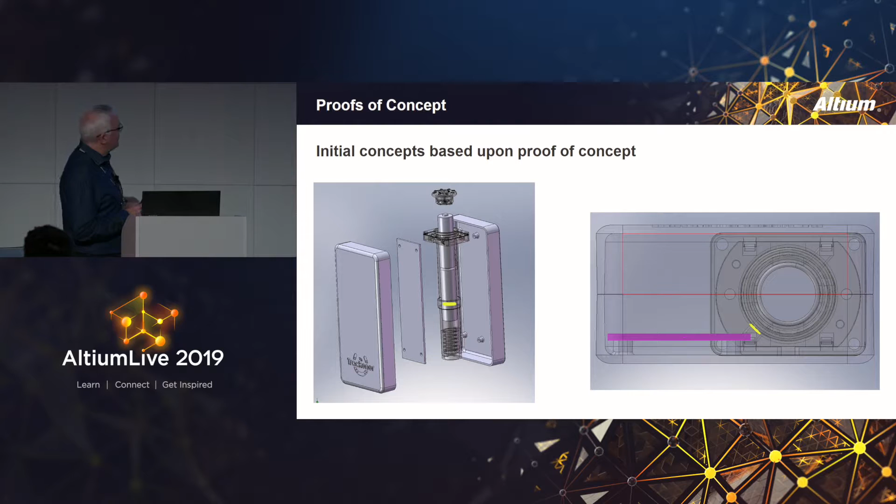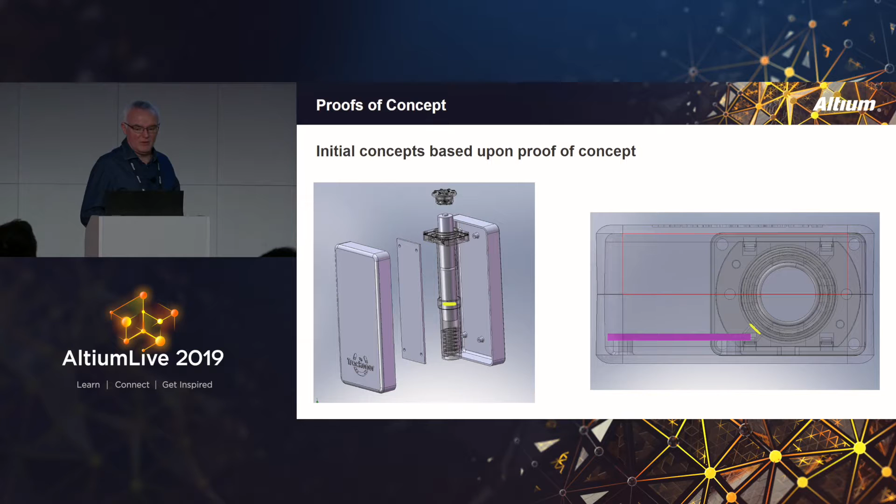And then we went and looked for a battery holder and things like that. But because of the space requirement of trying to get this device down between the forelegs and to fit the harness, which had already been designed, there was then the question of, okay, so we've now got some issues around where do the antennas go, and we've now got this nice big chunk of metal that sits over the circuit board. Excellent. Just what you want if you want to create a reflector.

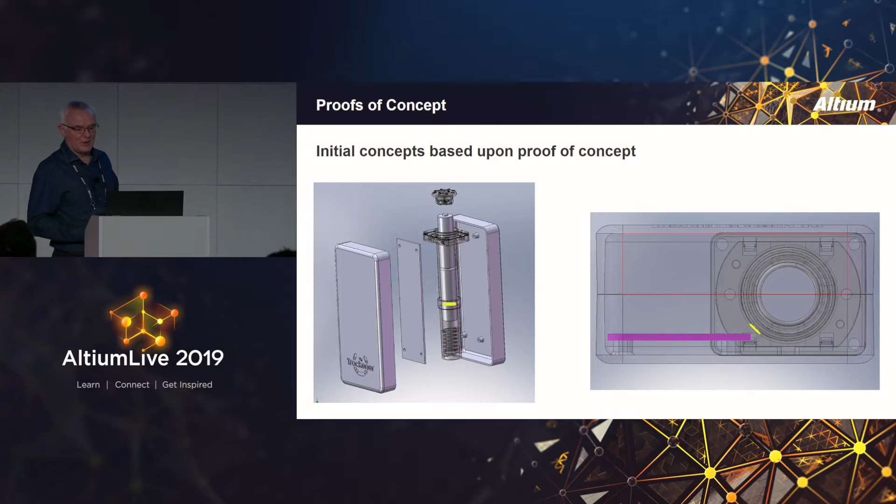So we did some concepts, and I should explain there aren't any circuits behind these boards. This was literally early stage, pre any significant investment. These were literally hand-placed components, just to get that initial feel of where this design is going. So one of the first things we established was that this white area was basically the starting point location: there will be an F-type antenna to do cellular there somewhere, and we'll figure out the exact details. I hasten to add the antenna design is done by a colleague of mine, so detailed questions on antenna design, don't direct them at me.

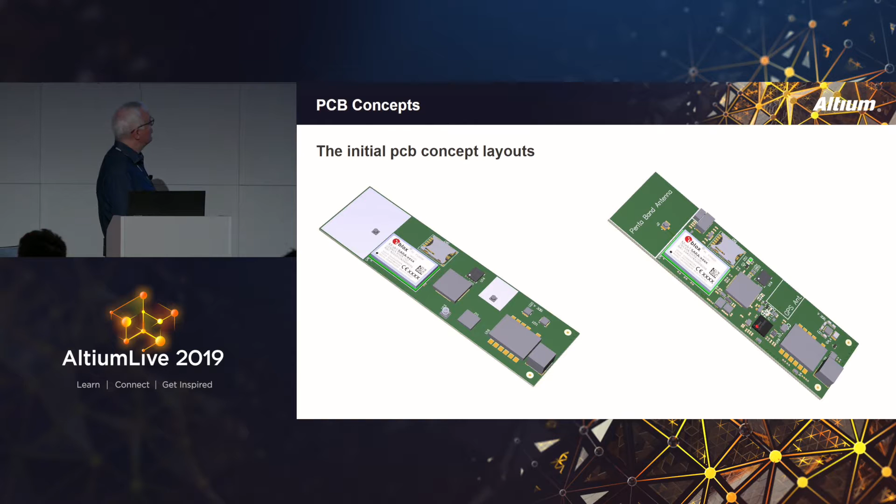One of the other challenges you've got, and this is a common problem with most IoT products, is as soon as you start putting a cellular module with any form of GPS, you now need to make sure there's a significant loss between the two, because otherwise, inevitably, you're going to deafen that GPS receiver fairly quickly. And not just when the GPS transceiver is turned on. Even if you power it down, you've got to have some loss between these two antennas, and that's partly the reason for the separation of the antennas and some of the trade-offs.

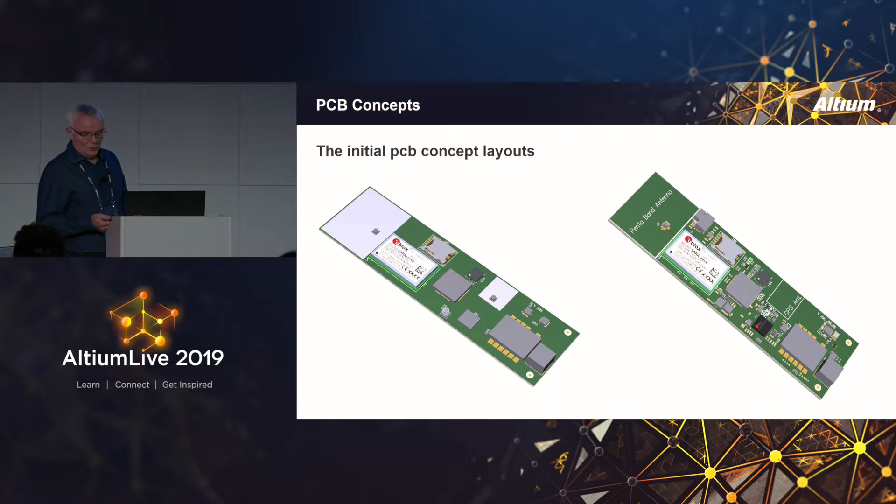So we did some more work, and needless to say, there was the inevitable mechanical work in SolidWorks. But as you can see fairly quickly, the battery holder itself is plastic, but you've now got this metal barrel sitting over the circuit board with two antennas on it. So that created some challenges, and my colleague started to look into, okay, how does that load the antenna?

Because we all know, as Rick explained so well in his presentations, as soon as you start putting anything above a trace on a board, whether it's solder mask, conformal coating, or even better, something nice and conductive, you've completely changed the field dispersal around that board. So we'll come on to some more detail on that, but that was at least to give an idea of where we started.

One of the other things I should explain, the original design was USB charged. The only problem with that was you'd have to go out periodically to the horse, take the device off the horse, take it home, and plug it into a USB port, because for some strange reason they don't put USB ports in fields that horses are in. I can't understand why. So that was the other reason for the replaceable battery, and obviously the other advantage of nickel metal hydride is it comes in a nice convenient AA size cell.

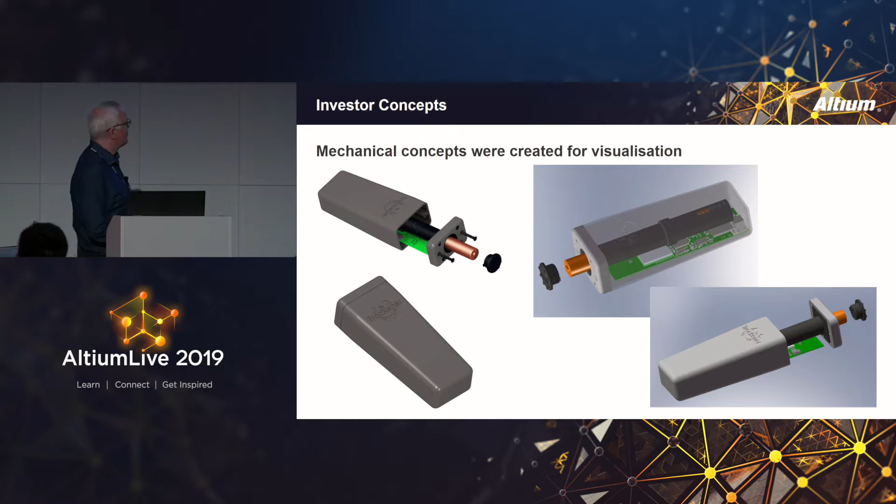What we also learned, unsurprisingly, is that that type of material is great for getting forms together, but structurally it doesn't work so well.

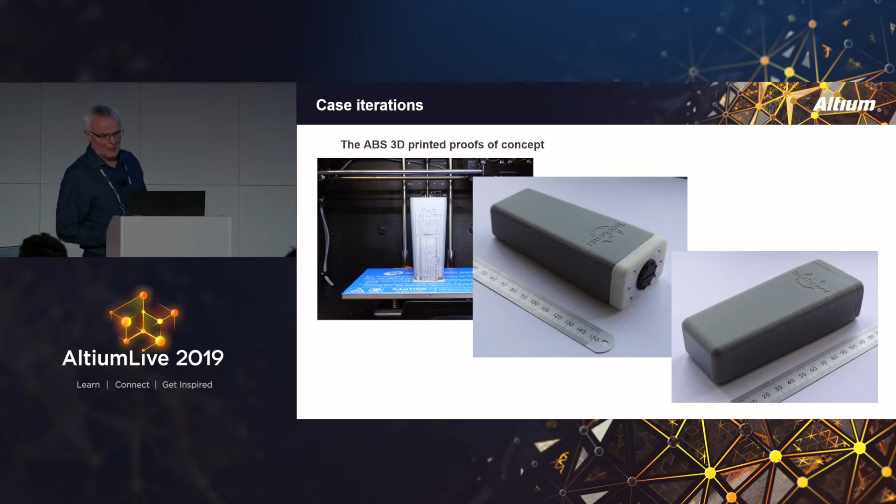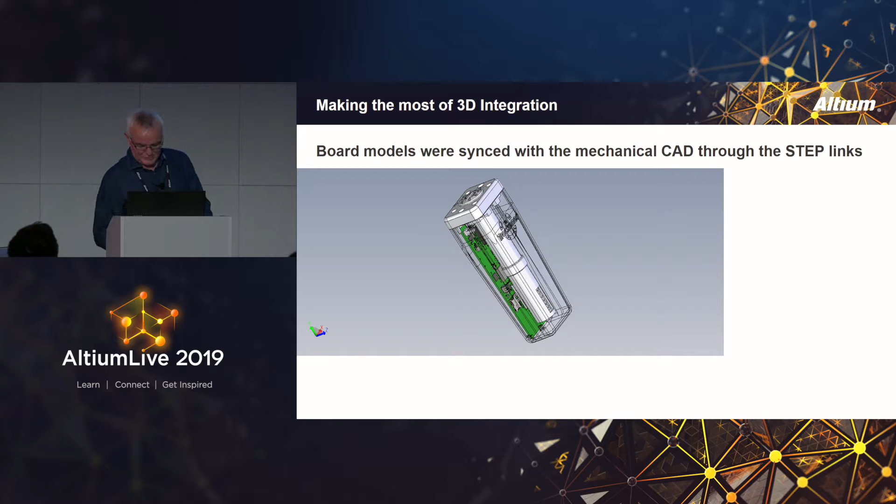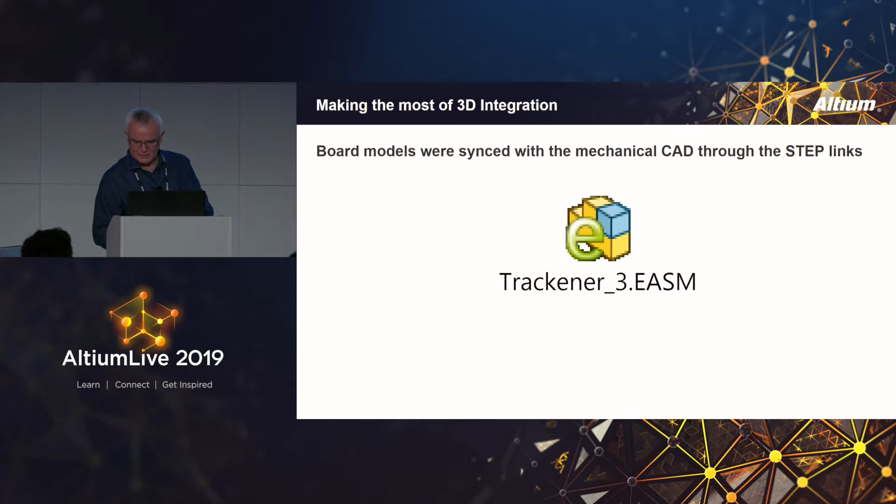So we ended up. So forgive me, I'm going to do that live demo thing, and this will probably go horribly wrong, but we'll give it a try. So we ended up, and this is, for anybody who's worked in some of the other CAD systems, this is where, I have to say, having done other odd, funky form factors, it's just, I've got to do, is it going to get me across? Yes. No. I knew this was a bad idea. Okay. So if you'll just forgive me a second. Do you have to take it out of presentation mode? Yeah, I think you're right, Rick. I'm just gonna have to. Right. Okay. Not ideal, but it'll do.

So I won't float it around too much, but as we saw in the keynote this morning, no secrets how this was done. There's the STEP export from Altium. This was in fact done in SolidWorks, but it just gives that reinforcement of just how good Altium is at this kind of thing. I hasten to add we've been doing this for a while, albeit the flow is a lot simpler, and I'd love to get to the kind of slickness we saw earlier.

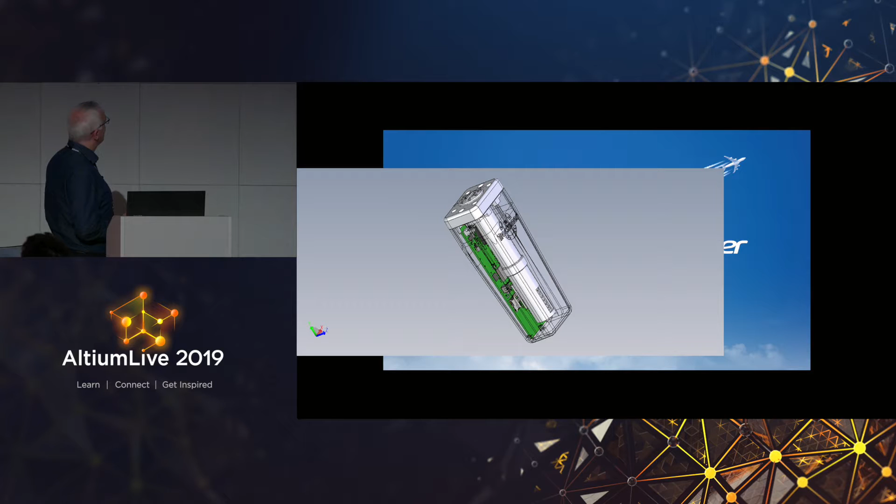But you start to get an idea of the problem. When the battery's out, we've got this nice big spring. We don't have to worry about that too much because it's compressed when the battery's actually inserted. But even so, we've now got a compressed spring plus the battery sat right over a cellular antenna. That sounds good. And as we'll come on to a little later, we've got to start thinking about where the GPS is going to fit.

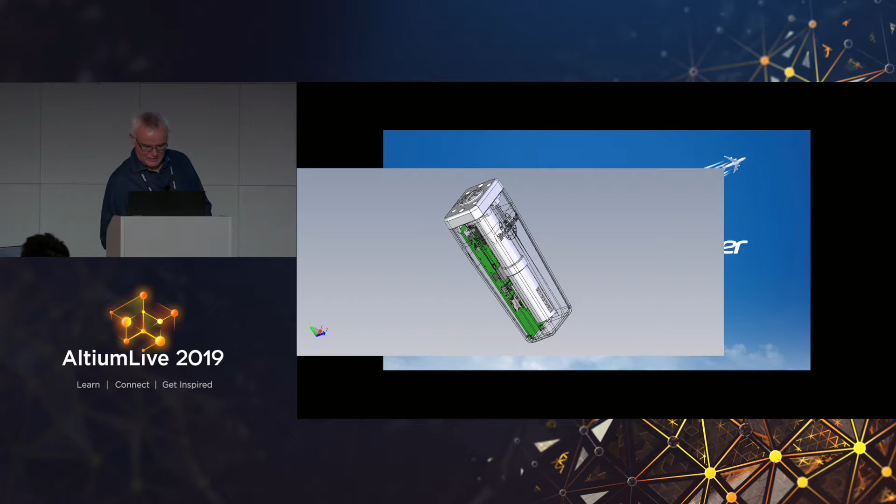So let's see if we can do this without. Oh, that's a new one. I've got an Altium slide deck in an MCAD drawing. That's quite new. Okay, let's get rid of that. Okay.

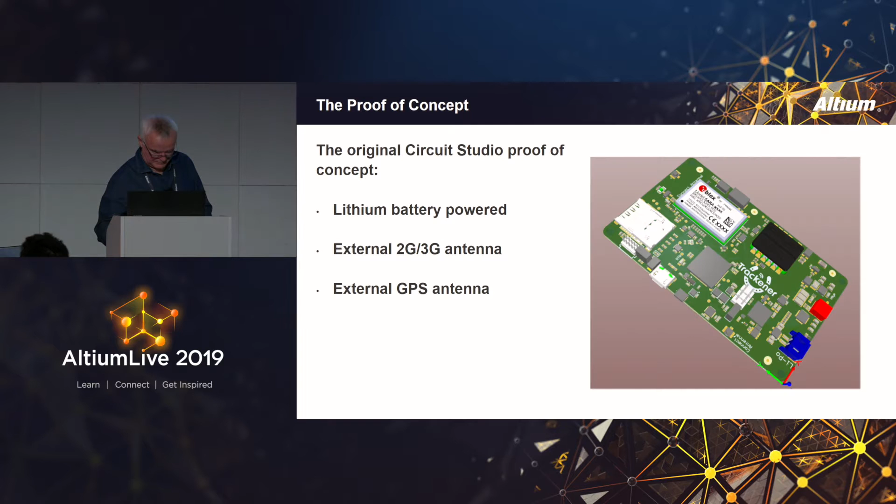So, by way of a slight digression, the other inevitable one that always crops up: regulatory. I touched upon it a little with battery safety, but of course we're now doing a radio product. So whether you're in North America and you worry about FCC, or in the EU and you worry about CE and the Radio Equipment Directive, you've got to think about them. And you've got to worry about battery safety standards.

One of the other reasons we encouraged in this particular case to go away from lithium: for anybody who hasn't been involved with lithium products, it comes under the dangerous goods regulations, a UN regulation. It's completely global, UN 38.3. What that basically means is, depending on the amount of lithium content in the battery, if you're really lucky and you've got a small lithium polymer cell in a product, you may find you can just pop one or two devices in a box and send it to somebody.

But as soon as any of the lithium content, or particularly if you've got smaller devices but you want to start mass shipping them, suddenly you move into the whole world of UN 38.3 and dangerous goods regulations. Well, that doesn't sound that bad. Is it a bit of paperwork? Well, no, unfortunately it's not. You get into, very quickly, a bunch of things.

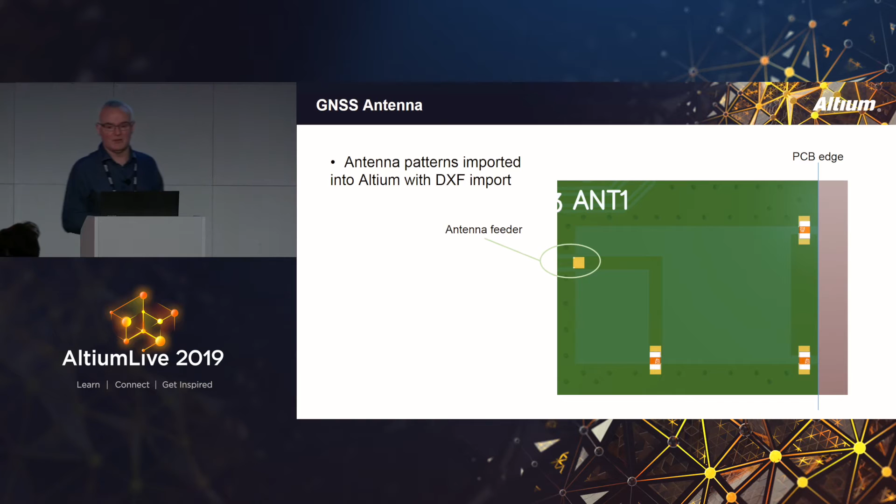So very quickly, I'm mindful of time, so I'm not going to go through the details. As I say, I'm not an antenna designer, but just to give people a flavour - this was an L-shaped antenna, so we could support the various frequencies of GPS and GLONASS. The way we did this, the classic approach, the RF engineer sketches up the features in DXF, and then we import them and create the symbols. We did the same with the cellular antenna.

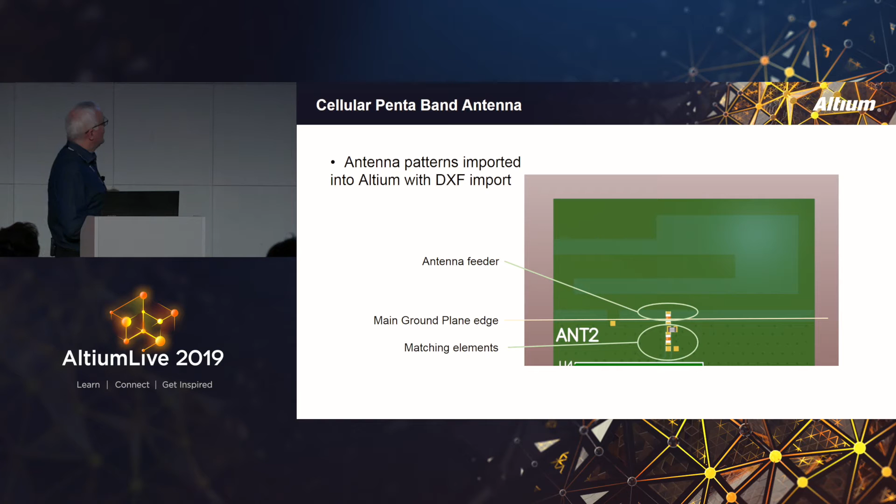We'll come on to some of the details on that one in a minute. So where did we end up with? We ended up, as you can see with this one, with the F-type antenna there. The GNSS antenna now tucks to one side of the battery holder.

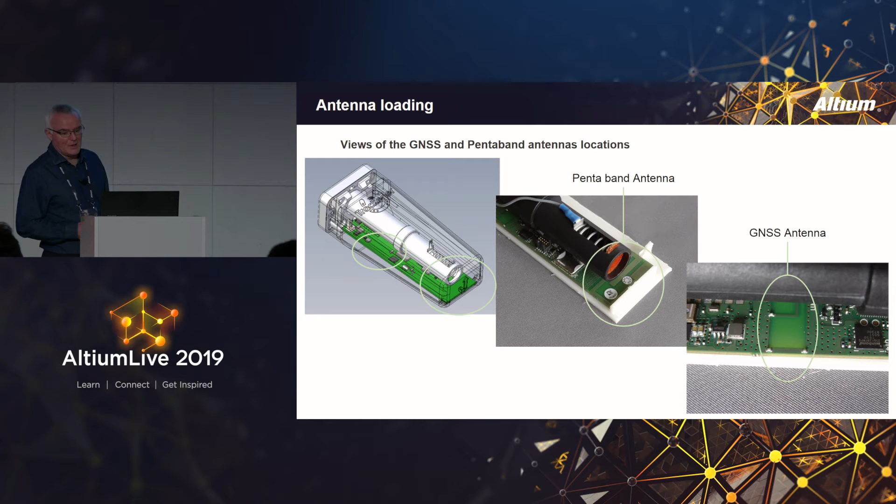So the obvious question was, how did you test it? We ended up making very sexy jigs with 3D printers - they're great for just knocking things up quickly. What this allowed us to do, as you can see, is place the battery holder in position - this in fact was the very early antenna proving platform.

I'm sure you've all seen our RF engineers attacking bits of copper-clad board with a scalpel. Well, that's exactly what that is. The point was that was able to get my colleague in the right kind of ballpark. And then obviously as we got a board, we were then able to do some similar level tests. This was also very helpful for doing the matching work. Just by way of explanation, that's the matching network there.

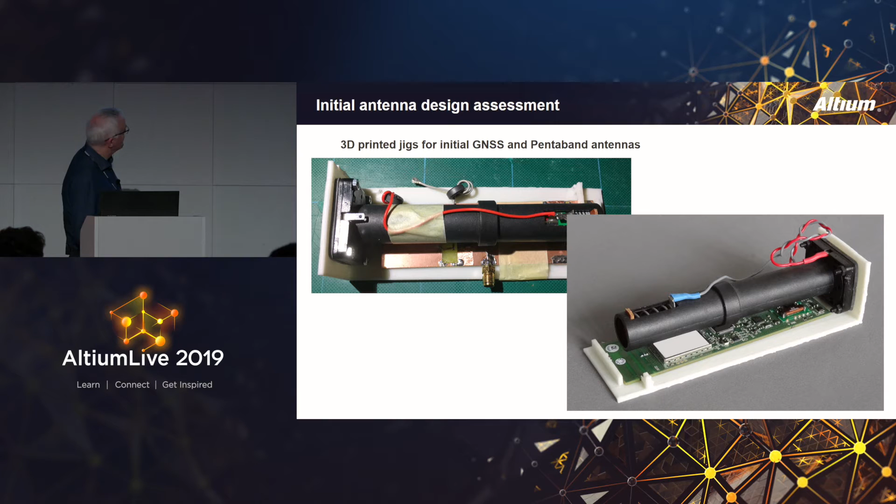And then, as one always has to do, we then went and did some field tests. Just for clarity, for those who've not been involved with this, this is not EMC testing. This is where you go into an RF chamber and you're actually doing a scan around the device to look at the propagation pattern of the antennas.

But when you place the device underneath the horse, that's more or less a big water tank. And that will interfere big time, right? Yeah, of course. It will have an impact, but it's like all these things. There comes a point where you can only do so much. We could have done more work, but one of the difficulties is horses vary a lot. I'll come back on that one in a minute if I may. But you've got a decent DOP for your GPS signal underneath the horse.

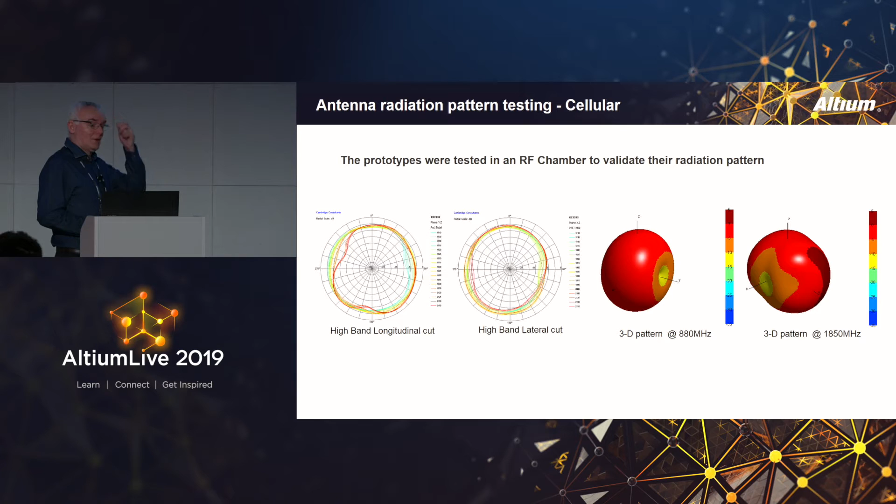So very quickly, we ended up with a couple of versions of the board. Probably there aren't that many changes - I'm not expecting anybody to do the eye test spot. Probably the major one was the usual story: you'll notice that we didn't actually put the ground shunt on the cellular antenna. That went on Rev 2 once we'd done some more testing.

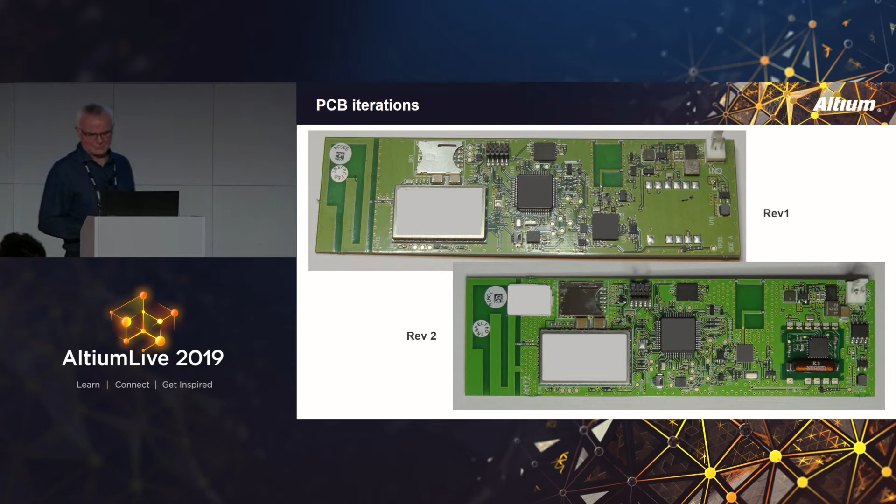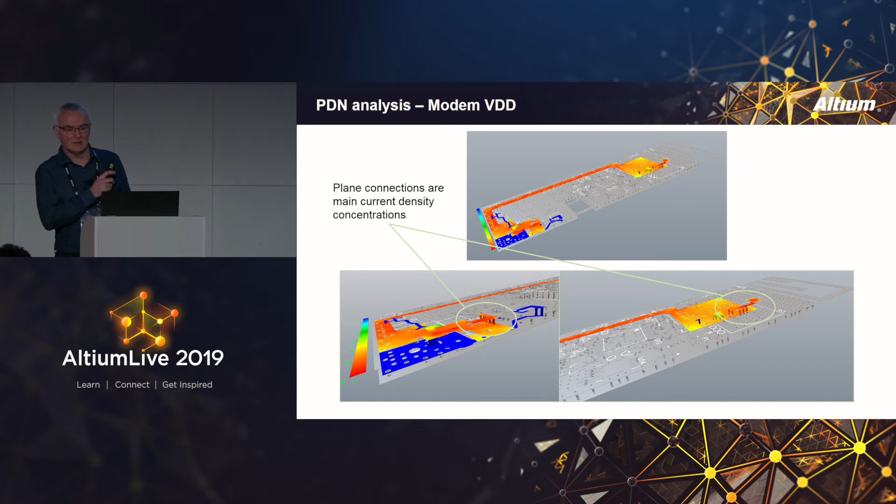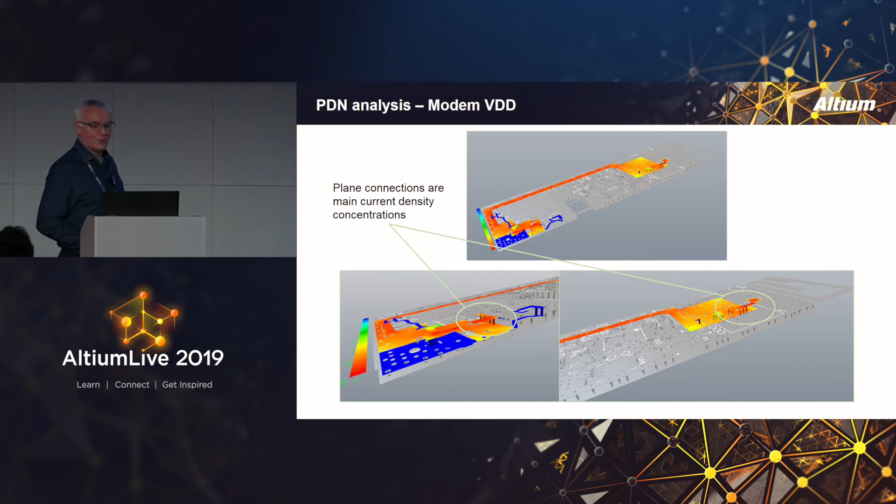I'm going to speed up a little bit because I'm mindful of time. We also did some PDN analysis. I won't go through those in detail, but suffice to say, obviously the main one is the transmit path, which is obviously the major power consumer. Again, we did some PDN analysis on this just to make sure - I stressed this is DC analysis, just to be clear, it's PDN DC analysis. So obviously we are expecting the decouplers in the cellular area to deal with all the HF paths, because if we don't, we've got some serious problems. But what we are interested in is, for those who've not worked with things like GSM, you can see current pulses of 2.5 amps on the supply rail, and we obviously wanted to make sure, it's a battery powered product, we want to make sure we're not just basically warming the board up instead of putting power in the transmitter.

You were doing a DCIR analysis. Yes, exactly.

Just a quick aside on manufacturability. If anybody isn't aware that you can do it, obviously we had to put in various test points for mass production, and there's a useful feature you can set up: if you are putting test pads down, you can just pop a rule in to make sure that you meet the component pitch, the test pad pitch that your manufacturer uses.

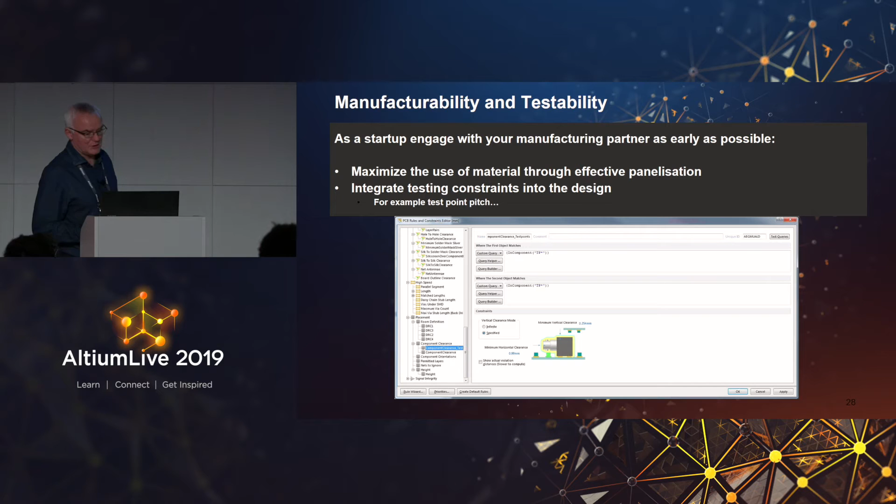So in terms of trials, this is where we found out about tolerancing. The obvious question was, okay, how big is this horse? Because I stressed this was only one or two - the majority of devices all went out, happy days, no problem. But there were one or two, and then suddenly you get into this rather interesting measurement called hands. I still don't actually understand what it means, but all I do know is that anything over about 15 hands is a big horse - that's probably the extent of my knowledge. So we had to look at this.

And this is where we found out about tolerances. Ah, okay, that's quite a big tolerance. So we obviously had to do some stress analysis.

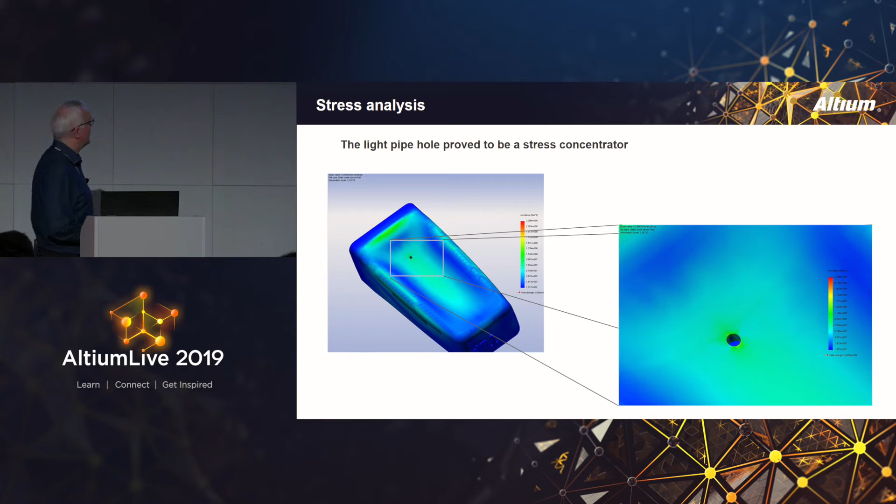Which was done by another of my colleagues. We identified the fact that the LED light pipe hole was, in fact, one of the major culprits and was the stress concentrator in the sidewall of the case. It's not actually that easy to see, but we did some work around that area.

Very quickly, some of the things, Altium's great for producing proof of concepts at any stage of a device, if you've got a small team or an investor. But I'd say even in bigger organisations, when you're trying to engage product teams, being able to put together very simple conceptual PCBs with some mechanics can be a really great way of helping people visualise things.

Understand the materials. Can't stress that one enough. Anything to do with an IoT device that involves wireless, you really must understand the materials you're using.

IR drops, particularly with battery powered products. Let's face it, at the end of the day, what is the biggest thing that's going to help you with battery life? Making sure that whatever comes out of the battery is given to assist the RF to get the signal out, because if you start wasting energy, and there's plenty of ways to waste energy in an IoT device, that's a good one.

Understand the regulatory piece very quickly. This product was fairly straightforward, a single radio technology. For those familiar with the ETSI standards around the Radio Equipment Directive, as soon as you put more than one radio technology in - transmit, I hasten to add - you can't use the pre-compliance declarations of the modules or subsystems you're using. So if you want to put Wi-Fi and cellular together, or DSRC, or any number of others, be aware that all of that testing your module vendor has done to prove the protocols and radio performance parameters, you will have to go through again in a multiple radio scenario. You can't rely on the pre-compliance.